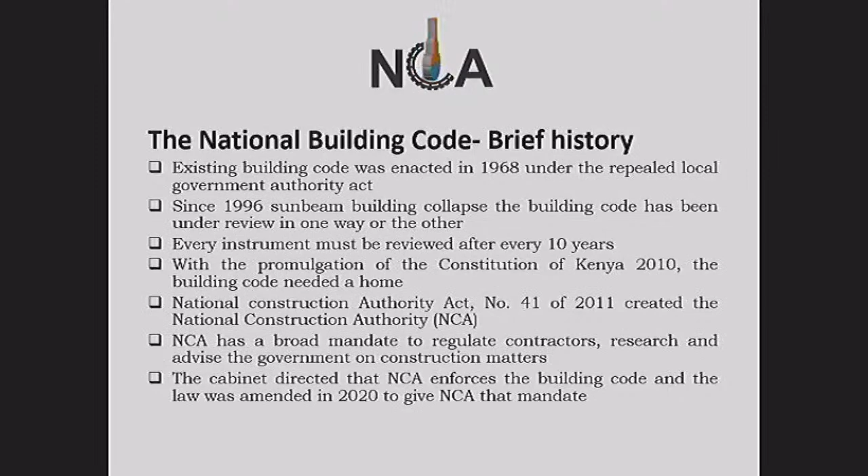I know the previous speaker introduced us to the history of the code, so I'll start on the actual code itself, very summarized. The beginning of the code looks at definitions, and we try to identify definitions that are not the same as in the English dictionary. For example, the term 'engineer' is defined as a person registered and licensed under the Engineers Act of 2011. Then, what does 'fire damper' mean, and is it different from a damper as you'd see it in the English dictionary?

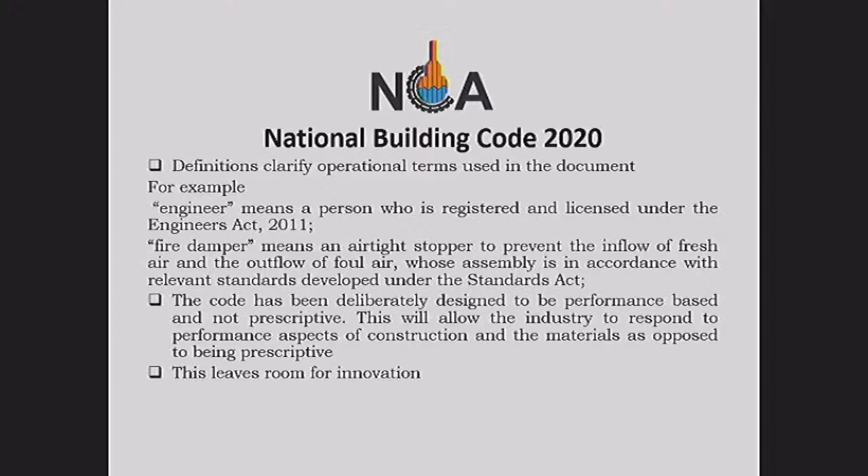The code has been designed to be performance-based, not prescriptive, which was very much the old code that told you what you have to use and do. So we are saying the industry, as you construct, can now respond to performance aspects of construction and materials, meaning you can use any material so long as it is performance-based and can meet the given safety standards. Obviously that leaves room for you to innovate. So the purpose of the code is to promote order and safety in construction works.

As contractors, you need to be safe in the space you're working in. We're also looking for the health and safety of persons in and about construction works - those living in the building, those constructing, and those outside the construction site. If I'm a passerby as you construct, my safety should also be ensured.

So the scope of the code is to cover design, construction, operation, maintenance, and demolition of buildings. We start from the beginning, and operation is very important because that's the longer life of the building. The maintenance aspect means we need to look after the building so it can serve its intended purpose. And at the end, when we demolish, how do we demolish a building safely?

Now these days, the code has an issue with the use of second-hand materials, but we are saying that is something that will change, because obviously we are all using second-hand materials. We should be allowed to do that for sustainability and to recycle materials. There will be standards for building materials, systems, and services - that is also in the code.

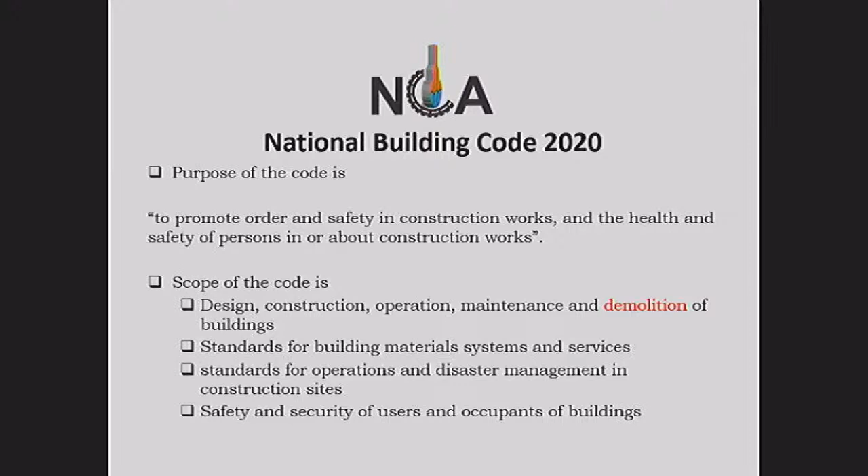Within the code there is also safety and security of users and occupants of the building, so that when we're in a building like this, we don't feel maybe we should not be here for much longer. With COVID, this becomes even more important - how are we constructing so that you are not just safe from the construction itself, but the air quality within the building is also assured, so that when I leave the Kenya School of Government, I'll feel I was in a building that is certified COVID safe.

So the code is an adaptive law, and it is adaptive because we are leaving it to the counties to use the code and adapt it to the needs of their community and the materials available within their particular areas.

It focuses on building control, and this is important because even as we talk to the planners, we are feeling planners look at development control as we look at the building itself. So there's no conflict - there's harmony with the Physical Land Use and Planning Act, which is a new act of 2019.

It also works in harmony with other laws, like the Standards Act - and very important, we have somebody from KEBS here you can talk to about standards. She says you decide which material you want to use and then bring it to KEBS for a standard. This code also appreciates other laws like the Kenya Roads Act, the Water Act, and the Public Health Act.

The Public Health Act is very important because if your building is unhealthy, what we call sometimes sick buildings, the Public Health Act inspectors can actually close it, and they can even ask you to demolish it. So it's important, even as you read this code, that you also read these other acts that we pointed out.

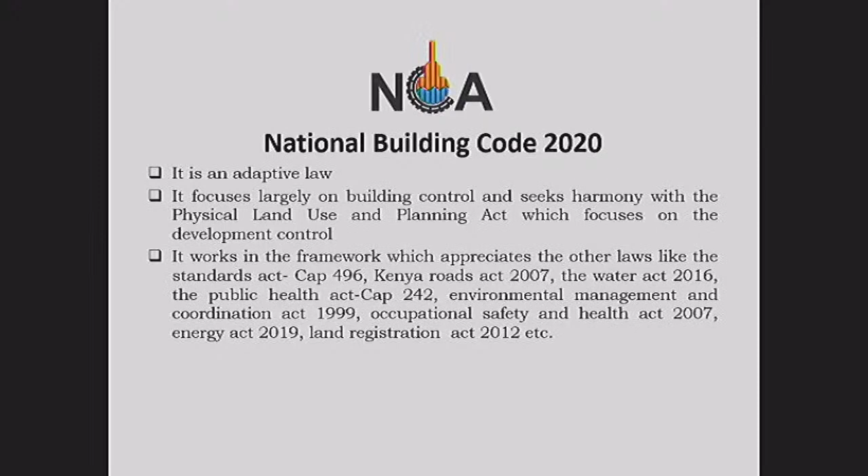Then the Environmental Management and Coordination Act, EMCA - whenever you're seeking approval for a building, you need to go to NEMA. Then we have the Occupational Safety and Health Act of 2007, the Energy Act as well, and the Land Acts, starting with the Land Registration Act, the Land Act, and the Land Control Act - all those land-related acts would also be of importance as we look at the code.

Part 2 looks at siting and space about buildings. Why do we look at siting and space about buildings? This is really to ensure health and safety of users - those inside the buildings, but also those outside the building. The code should obviously be compliant with planning requirements.

That's why even you contractors need to read these together with the Physical Land Use and Planning Act - issues of frontage, so that you do not obstruct the road outside, and issues of view: as you come out of a space, are you able to access the road outside without blocking traffic?

And then we have means of access, again, that is also important. And then the fact that a building shouldn't obstruct, endanger, or cause nuisance. Because you're not living in a vacuum, or building in a vacuum. So your building should not be a source of nuisance with neighboring spaces. And this is why NEMA then is important when they do their stakeholders, or they require you to also be part of agreeing whether a building should go on or not.

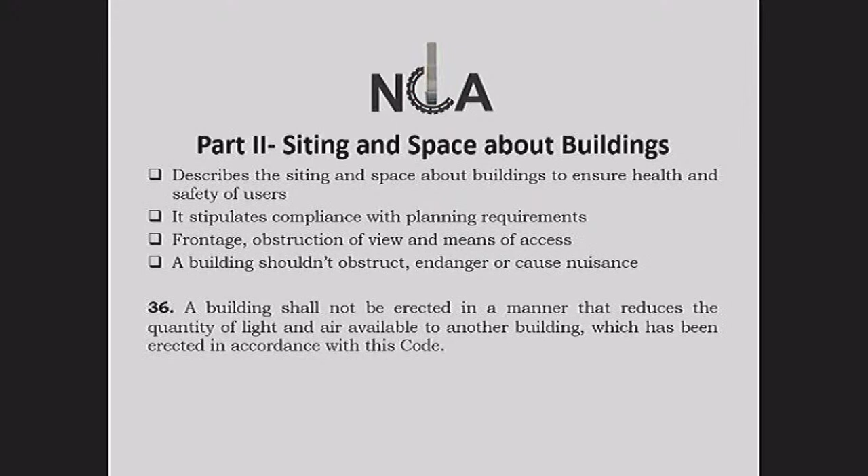Then a building should not, within this siting and space, be erected in a manner that reduces the quantity of air available to another building. And this is important even as we build buildings back to back, that you ensure you're not denying your neighbor air that flows freely into that building. You're not even blocking light for the other building as we also construct. Just be mindful. But now this will be under law, even as we talk about being mindful of our neighbors.

Part 3 looks at parking spaces. So it stipulates the requirements for parking and external circulation, so that when I come into a parking space, I'm able to have the standard parking space as required, but also able to circulate.

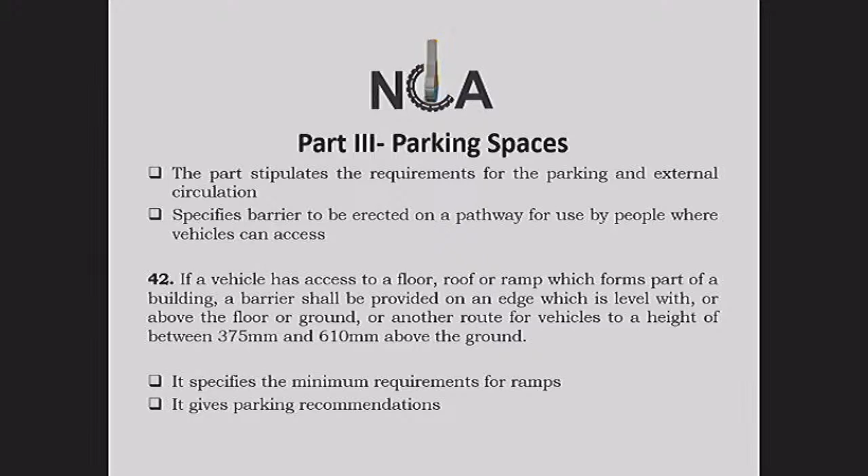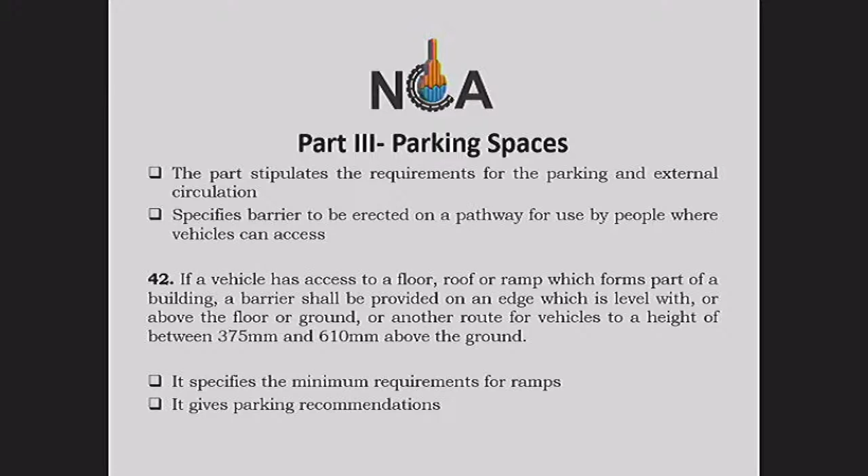Then it specifies also a barrier to be erected on a pathway for use by people where vehicles have access. So looking after not just the driver or the vehicle, but also that pedestrian in that particular area. Within parking spaces, if you have access to a floor, roof, or a ramp for vehicles, then it's also part of the building, and therefore the specifications are given in this building code. So it specifies the minimum requirements for ramps, and also gives parking recommendations, so that you don't have very tiny parking areas, so that when you open the door of your vehicle, it hits the next vehicle, hits a wall or a pillar.

Part 4 looks at site preparation, and this is really saying that before you erect your building, or alter, or scaffold, or even demolish a building, the owner of that building shall erect a fence. And I think a lot of people are doing that now. So erecting a fence, hoarding, or barricade, and this is to prevent the public from entering the plot. And very important, not just to prevent them, but also to protect them from activities at the plot.

And we've known accidents that happen outside of the plot, on the pavement or on the road, when a stone or materials fall from a building and have killed people. I was sharing yesterday, there was one student engineer who was killed by a stone that fell from a building. And I knew that student engineer, so it's very close to my heart, that aspect of safety.

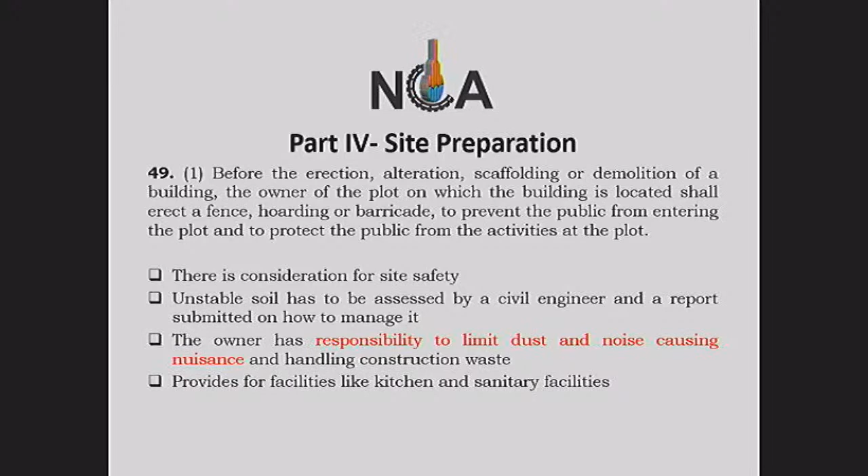So that consideration for site safety, unstable soil has to be assessed by the civil engineer, and a report is submitted, and I think you're already aware different soils need different considerations. The owner also has a responsibility to limit dust and noise, and also handle nuisance and any construction waste. Within the site, contractors are required to provide a kitchen facility and also sanitary facilities, even now. So we are saying the code now tells you, you don't have a choice, you have to do that.

Then part 5 is looking at building materials. And the building materials here, what we are saying, again, is performance-based, not prescriptive, but they must comply with the Standards Act Cap 496 of KEBS. And I think when you talk to our engineer on the standards, she'll tell you even the stabilized soil blocks have a standard, and the EPS panels also have a standard. So already the alternative building technologies are being given a standard by KEBS, and therefore we can use them now.

So considerations for circular economy are not locked out, as long as the material used in construction complies with the relevant standard. So we are saying any material, mud, stone, sticks, brick, roofing material that is grass, thatch, or makuti, all those materials can now be used. I think if you listen to the previous speaker, he said those are used in tourist hotels, but we have not used them. But now we can use them so long as they comply to the standards required by KEBS.

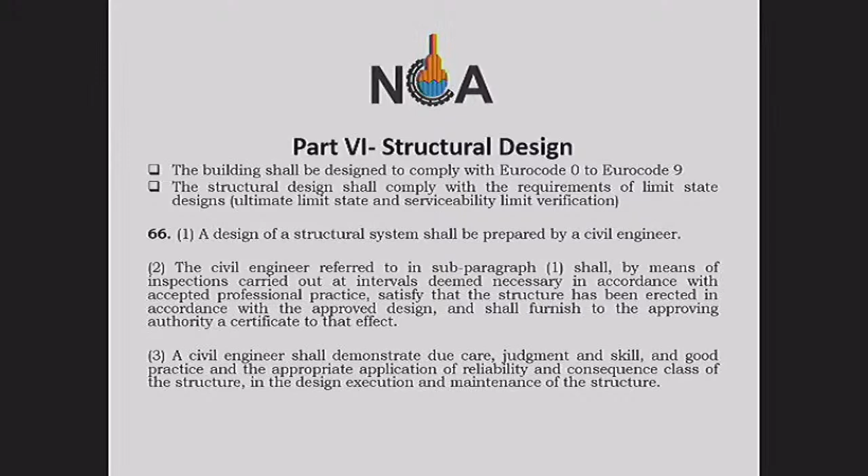Continuing on structural design, excavation that is more than 3 meters deep shall be designed by a civil engineer, and adequate supervision and quality control should be provided at all stages of design and construction of structural work. If you have a building with 4 stories in height and you're looking at a foundation, this should have a geotechnical investigation report as well.

What we are trying to do is make sure the buildings are safe. Initially a lot of collapses used to happen in Nairobi, but now you can see collapse of buildings happening in the counties as well.

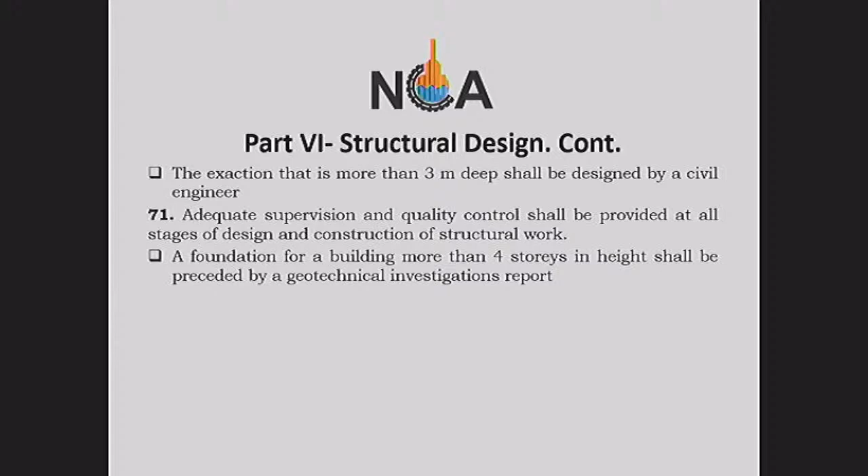Then in terms of space within buildings, this is part 7. We talk about the height of the space, giving a minimum in terms of ceiling height, and the minimum dimension of a landing, lobby, and passage. So really making sure there is enough space for people to move around the building.

If you have a swimming pool, you must ensure that there is a wall or fence so that a person cannot access that pool from the street. Any stranger coming into your space should not be able to access the swimming pool. I know one case in a school where somebody was able to access the swimming pool and was found in the morning. He couldn't swim and he was gone. So these are practical examples of why this should be here.

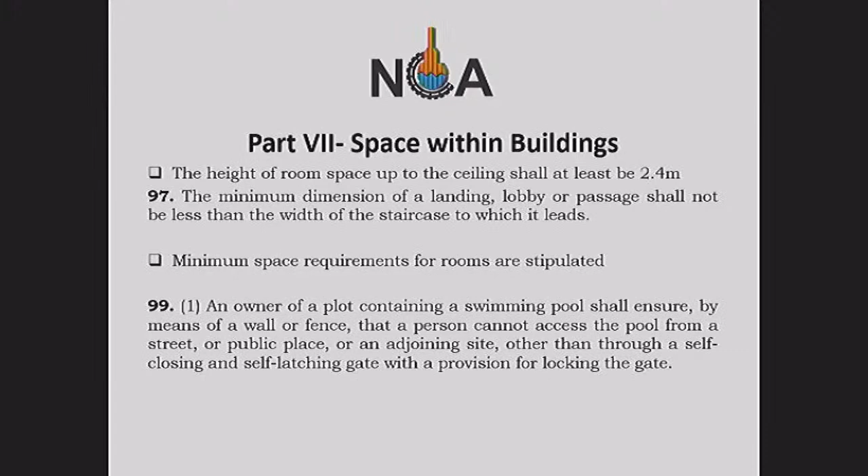So if you have a gate, it should have a self-closing and self-latching gate with a provision for locking. So we're not just talking about safety in swimming pools for children 12 and under, but also for grown-ups. Part 8 is looking at floors.

If you're looking at black cotton soil, how do we look at floors, because it affects floors? Black cotton soil ideally should be entirely or partially removed, or you have a suspended floor erected on the black cotton soil, because you know the qualities of black cotton soil. The requirements also for floors in relation to fire are also set out.

Floors should not be slippery, and we need to be very careful in the choice of flooring material, floor finish, especially ceramic tiles. In terms of floor finish, they should be approved by the architect and the civil engineer supervising that project. Again, the requirement to have professionals on site.

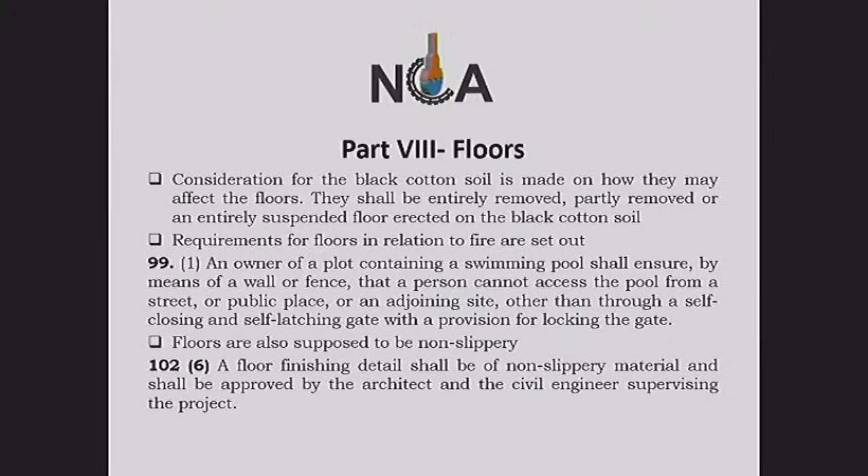Part 9 talks about walls: foundation walls, retaining walls, and load-bearing walls. Ideally, they should be safe. A lot of the time buildings will collapse because the walls were unstable, or the walls have collapsed and therefore the building falls.

Other than that, we must ensure that the wall is protected from the elements, especially rain. So contractor, you need to construct a wall that is resistant to penetration of water. And then the argument that hollow blocks cannot be used to construct a substructure foundation wall.

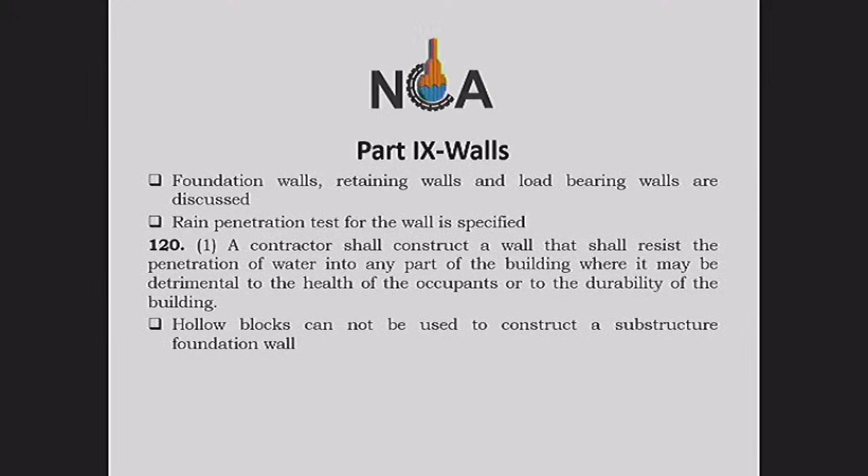Then I'll just finish on part 10 before the architect comes - the other one was part 9. Part 10 looks at lighting and ventilation, and this is important, especially with the need now for a healthy building.

Rooms should have means of lighting and ventilation which enable the room to be used without detriment to health and safety, or causing nuisance, for the purpose for which the room is designed.

We are really looking at reducing our energy bills, so sufficient natural lighting should be provided, and artificial lighting should be a supplement. It should not be the main source of your lighting, so we can reduce electricity bills for investment purposes for the landlord or investor, but also for our own health, because your eye is better trained for natural lighting as opposed to artificial lighting.

Natural ventilation is also recommended, and as much as possible, have the windows open as opposed to AC. All these energy efficiency and environmental design considerations are based on the Energy Act 2019.

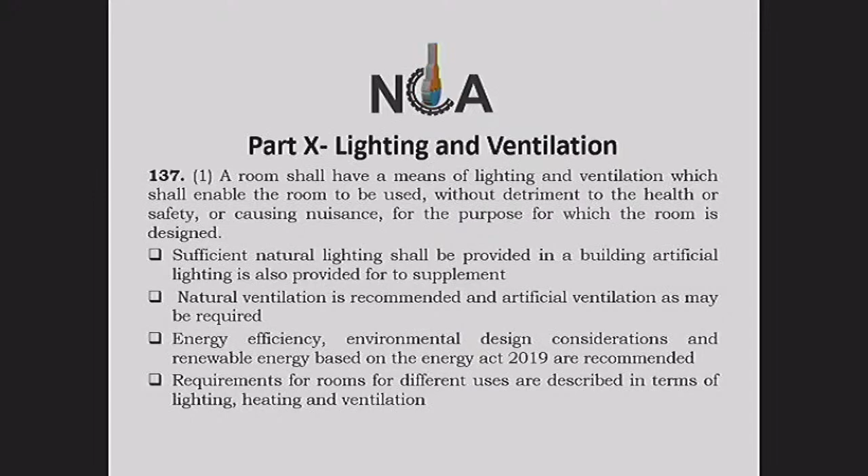Thank you, Dr. Catherine, for that elaborate presentation. I'll pick from where you stopped. Basically, the part that she was handling is on architectural issues, on materials and design.

I think for the sake of the camera, I'd like to keep my mask on. I adhere to COVID rules consistently. Let me remove it for the sake of the camera. Thank you.

That clause 190, the responsible architect or civil engineer shall receive from the specialist manufacturers a warranty that a full thermal movement safety check has been carried out related to unbroken areas of glazing. So it's like checking on the glazing that is being used by the designers, and the warranty from the manufacturers. It talks about specifications in terms of size, thermal check requirements, and the glazing thickness for curtain walling, which is also limited to a certain measurement, like 6 millimeters. Then we've got...

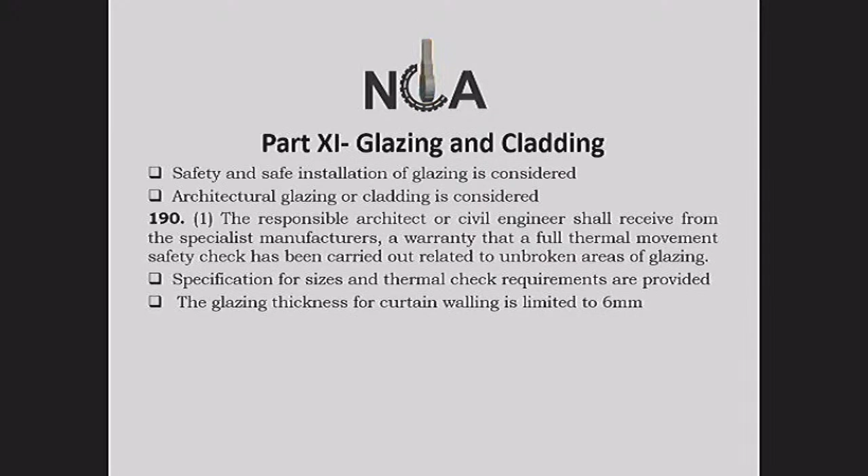Vertical circulation for buildings, where we have a part now discussing staircases, lifts, and escalators. There are several clauses on that. An example is clause 200, that talks about a building which exceeds 1 story in height shall have at least 1 staircase to access the upper floors. So in a building that exceeds more than 1 story, that is 6 meters or even less than 6 meters, because a story can be with a mezzanine, you shall design and have a staircase for use.

The same case happens to lifts. Lifts are limited to a certain number of floors, and a building shall have a means of escape in case of any emergency, as may be required by the intended use of the building.

We talk about safety, like this auditorium. I know there's one of the clauses that talks about auditoriums, in terms of signage, in terms of access, emergency accesses, this code seeks to enhance that. Special staircases, firefighting shall be considered, and a staircase shall always be safe, like having a handrail.

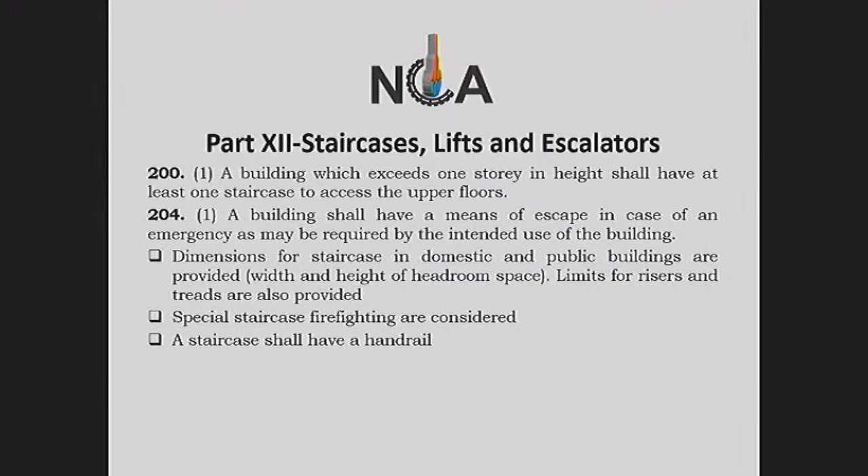Then we would have part 13, or part 12 continues discussing staircases, lifts, and escalators. We talk about considerations for escalators, and firefighting lifts are provided with their measurement and usage. Then there will be safety considerations and warning signs in regards to lift pits, such that, as one of the clauses says, the pit used for the lift shall not be used for anything else, and there shall be access to the machine room and plant rooms that shall be considered.

It talks about roofs in part 13, Roman numeral 13, some of it is written in Roman. It talks about roofs, and we talk about considerations for design of roofs. We talk about pitch roofs. We talk about flat roofs. We talk about waterproofing standards, which will also be provided there.

One of the clauses, like 251, where a nominally flat roof of boarded or concrete construction is used, it shall have an impervious surface and a fall not less than 1 in 50.

Currently, many of our clients, the consumers, the developers, have all of a sudden gotten an interest in flat roofs. When I was schooling back in the 90s, we were discouraging flat roofs, I don't know where, that's where architecture comes from. We were discouraging flat roofs in the tropics because of heavy rains. But all of a sudden there's an awakening, and people are finding flat roofs very good, and they are requesting for the sense of flat roofs. So when we do that, we will be considering waterproofing and the challenges that come with a flat roof.

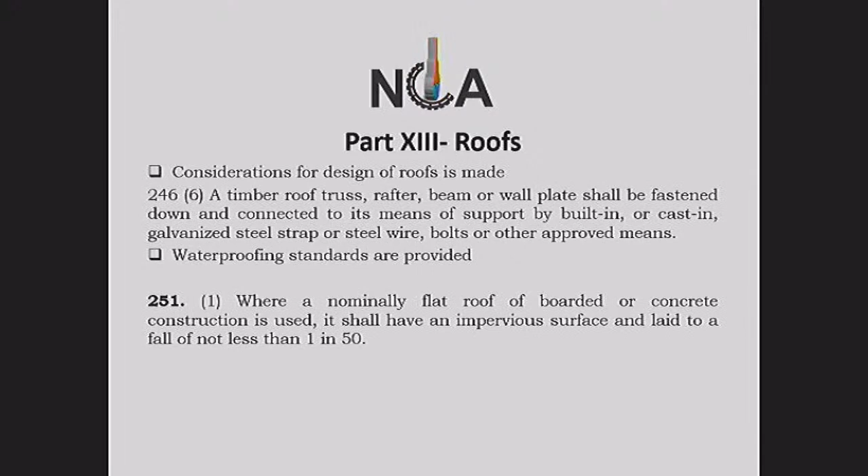Part 14 will talk about water services, drainage, waste disposal, and stormwater. Basically, this code is for use by designers, engineers, architects, contractors, and even the consumer, who are the stakeholders, the developers.

We talk about rain water harvesting, which is provided, as well as plumbing that separates grey water from black water. I was discussing that with Dr. Catherine in the morning, because of the effect of soakage for certain soils like black cotton soil, you realize this is not being adhered to. So it's not a prescriptive regulation, but more performance-based, where I have room to design for that particular site.

He'll talk about provisions of wash closets, and appurtenances are provided with reference to the correct standards. So when we talk about stormwater disposal and wastewater disposal, we give guidelines on how this is supposed to be done.

Clause 285 says the owner of a plot shall provide suitable means of control and disposal of stormwater which may run off from the construction works, not only for the developer, but also for the intended user or the person using that facility.

There are also guidelines on sewers, design of sewers, and appurtenances are provided. We try to simplify terms. When we were sitting down with our lawyers, they wanted some description of these terms, so that we do not use a term unfamiliar to people working in the built environment.

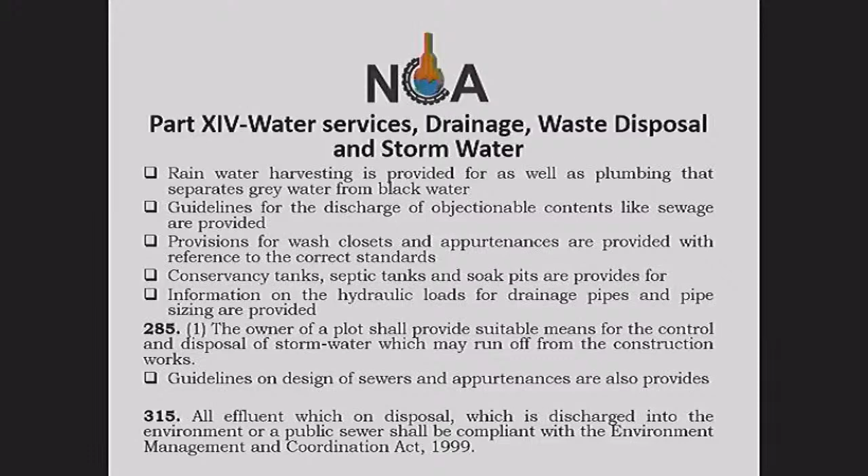There are electrical installations also discussed in the code, and standards for electrical installations are provided. After sitting with engineers in the committee, I've come to realize that engineers design with codes. That's why you'll find Euro codes, and ones that have been customized to become Kenya Bureau of Standards codes. That's what would actually be in this code to help us develop. I think there was also some interest with the World Bank.

They are very particular on which codes we are actually using. I believe for people who want to develop a building within our country and are not Kenyans, they would be more comfortable designing with codes that are internationally accepted, like the Euro codes.

It will talk about installation of protection against lightning. Lightning is provided, and a switch socket, an isolator, a consumer unit, distribution board, an electric bell, a television outlet or data outlet in a building shall be installed in accordance with KS ISO 21542, the standard on building construction, accessibility and usability of the built environment. So it keeps referring to codes so you can design within that.

In landscaping, I think this is an upcoming field where we are realizing we need a sustainable environment. In landscaping, an owner shall provide soft landscaping area at least 20% of the plot area, which shall have trees, vegetation, and permeable paving surfaces.

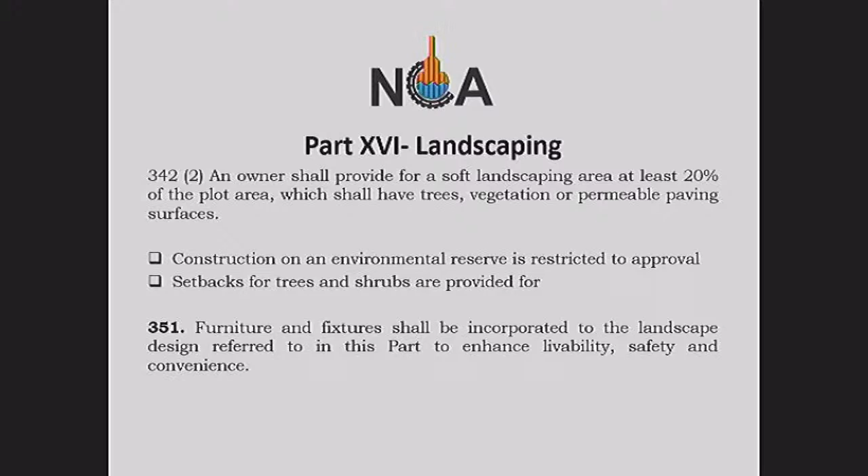Furniture and fixtures shall be incorporated into the landscape design referred to in this part to enhance livability, safety, and convenience. For me, the building code is about safety - safety in the construction industry, and safety for the user that we are designing and developing for.

There will be a part on inspection and maintenance of the built environment, and provision for inspection of a building after every 5 years is provided for. Several inspection types are anticipated: visual inspection, full structural and civil inspection, full building condition survey, full building services inspection, and specialized building investigations, like what Dr. Kathleen practices. They come in terms of these inspections, and that is provided for in the code.

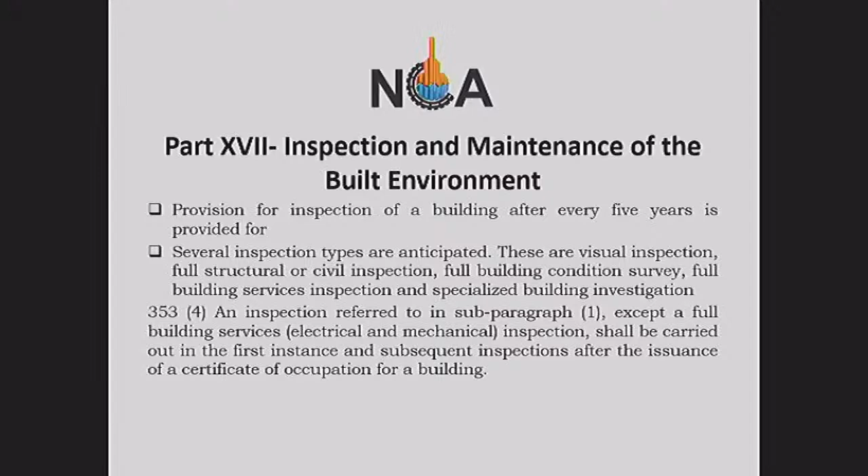Part 18 talks about non-waterborne waste disposal. Siting and construction of pit latrines is discussed in detail, and the practice manual for sewerage and sanitation services is referred to. Clause 360 talks about a latrine, saying a latrine and an ablution shall be provided as separate compartments.

Each compartment shall have minimum dimensions of 1350 millimeters by 750 millimeters, and as a combined compartment having a minimum area of 1.35 square meters. We are actually talking about minimum - we leave the designers to be able to design within those parameters.

Then part 19, we'll talk about refuse disposal. Nowadays in our community, especially in Nairobi and the surrounding areas which we call Nairobi bedroom, people have got an organized way of collecting garbage. In the code, every building shall have approved means of refuse storage and disposal within your compound. Details of storage chambers and containers are provided for, and provisions regarding chutes, hoppers, and incinerators are also provided for here.

Clause 369 states a service room containing an incinerator shall be separated from the remainder of a building by a fire separation that has a fire-resistant rating of at least 2 hours. The design, construction, installation, and alteration of each indoor incinerator shall be in accordance with the Environmental Management and Coordination Act 1999. This is how the building code interacts with other existing laws used within the building environment, because the code is not just operating on its own.

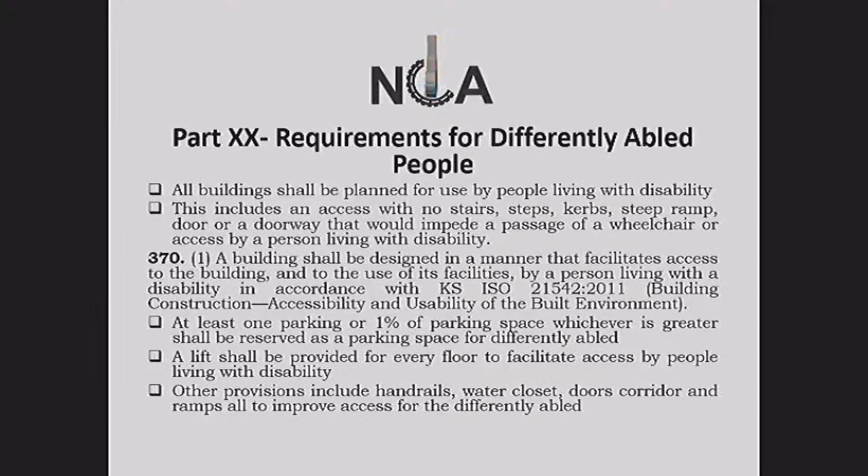Part 21 talks about fire safety and fire installations, and we actually have an expert on that. That's why we have Engineer George Karoki to assist us, and he'll tell you that every building shall be designed and constructed to ensure that in case of fire, safe evacuation is possible.

There is a limit to the spread of fire. The building remains stable, so as not to endanger other buildings. Like when he went to Dedan Kimathi University yesterday, the first thing he noticed was the signage. And when he got in here, the first thing he noticed was that the door is not opening to the outside. This door, I think, is the fire exit door.

I checked when I went up to the washroom to see whether you have a door at the back, because people should be able to evacuate an area like this one. The building code will now assist us in guiding how you can design a building to be used for safety and for safe evacuation during a fire.

A mechanical engineer shall design and certify the firefighting system, provide a firefighting lift, and also provide a staircase for firefighting, or the rescue staircase. Provisions are made for separating non-combustible walls as well as fire division walls. You talk about materials, and how they can resist fire in case of a fire outbreak.

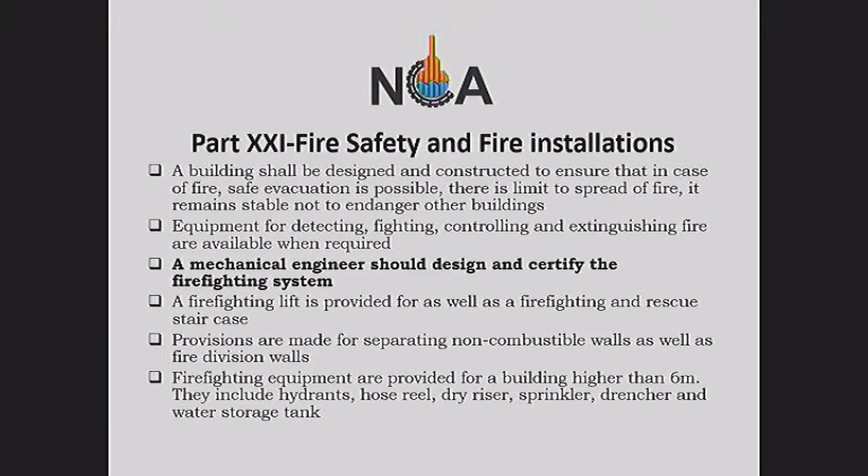Firefighting equipment are provided for a building higher than 6 meters. Such a building shall have firefighting equipment, whatever kind, including hydrants for provision within the compound. There will be a hose reel, the dry riser for such buildings, a fire sprinkler system for special spaces like basement parkings, a drencher system, and a water storage tank to provide water to fight fire in case of a fire outbreak.

As you can see, it's a whole big part, and there are still more clauses on fire safety and fire installation, like clause 460: a building shall not be erected on a plot unless the plot has access for purposes of firefighting and rescue from the building.

Even in slum areas, and I'm happy for what the World Bank has been doing with KISIP and other agencies trying to improve our informal settlements, we should be able to provide access for firefighters in such kind of areas.

A building shall have emergency evacuation coordination procedures posted along all floor exits, including in the form of diagrams displayed in a way easily understood by a person. I believe that could be missing here. We should have signage for firefighting showing the escape route, and how to behave in case there is a fire outbreak in the space you are in.

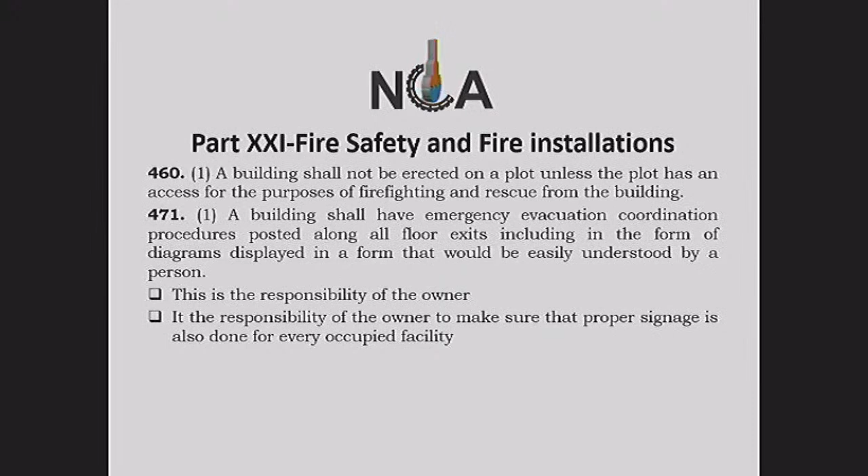Part 22 talks about demolition of buildings, and this is about safety. Clause 485 says all demolition works shall be carried out under the supervision of an experienced person for safety. Demolition shall be done by people who understand the structure being demolished, under the immediate supervision of a qualified engineer or architect. Somebody yesterday mentioned that we do not just demolish a building because it's illegal.

There are some buildings that could be demolished to give way for bigger development. When that demolition is happening, an engineer, architect, or somebody knowledgeable about demolitions has to be engaged so we can have a safe environment when demolishing, and also be able to salvage some of those materials. It reminds me of what happened in Nairobi with the railway scrap, which was being demolished.

Being part of the ministry that was charged to demolish it, I got to overhear that they were trying to salvage the materials that were there. So we need professionals involved in demolition of such buildings, probably even to ensure continuity and sustainability.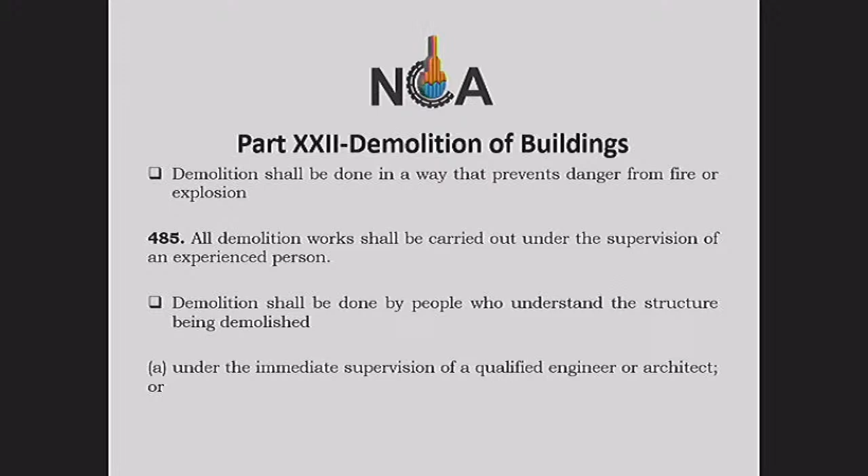Part 23 talks about disaster risk management. A person undertaking a design, planning, preparation, or construction phase in the use or demolition of a project shall take account of general principles of disaster prevention in the performance of those duties during all stages of the project.

This is to ensure that persons involved in construction coordinate well for the safety and health of everyone involved. The owner has a duty to the designer or contractor to provide all pre-construction information. Designs done or modified outside Kenya shall have to comply with this code. Provisions for health and safety during construction, records of health and safety, safe place of work, site good order and security are provided for.

Part 23 continues with disaster risk management, talking about scaffolding and working platforms and how people involved in those areas, like demolition, should behave so they can actually be safe.

Just like what our Daktari talked about, this lady died at the University of Nairobi. I was passing along Stanley Hotel, and there were renovation works going on there. As I was practically there, a stone fell all the way from one of the floors and landed on somebody's head on the street, and the person passed on.

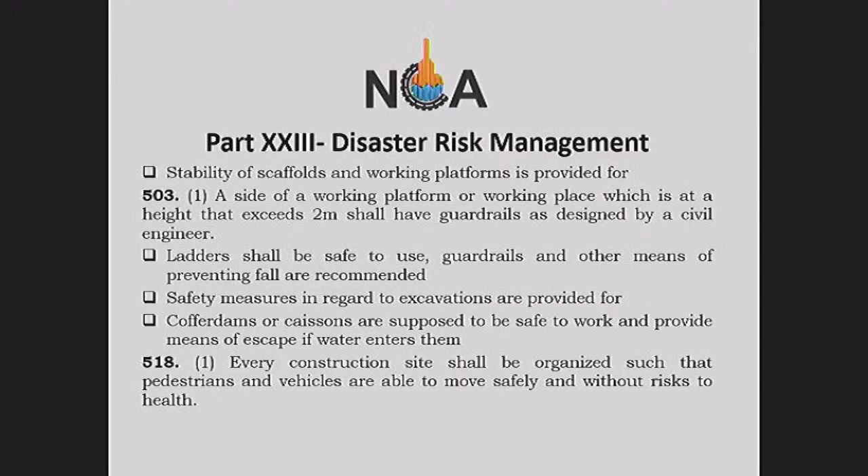Safety measures in regard to excavations are also provided for. That's the issue of ensuring that those deep excavations are well protected so we can walk around and be safe. That is part of part 23, which continues on disaster management.

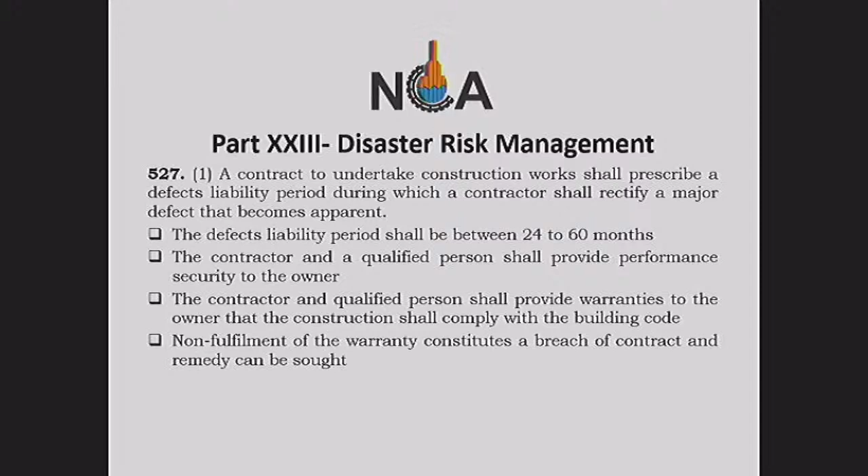I believe you have read the code. This presentation is about certain clauses in the building code. It talks about access roads in part 24, access roads, cul-de-sacs, and other private roads. The width of a road or street shall be guided by the street design manual for urban areas in Kenya. The code works together with other existing laws, and for urban designers, the manual used for street design is cited here.

A private street or cul-de-sac shall have a footpath at least 2 meters wide. Before this exercise, someone mentioned the area where they live, because when walking, probably there's nowhere to walk as a pedestrian. Even those of us who drive become pedestrians at some point, and it's very unsafe without that.

There should always be a footpath alongside a street, whether a cul-de-sac, a private street, or the normal access roads we use. The width of an access road shall be at least 6 meters, and the footpath thereon shall be at least 2 meters wide, because roads will go beyond 6 meters.

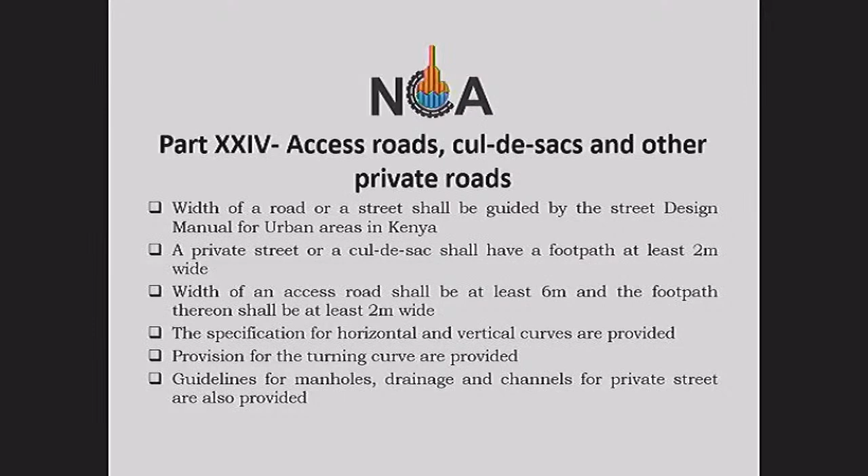The specifications for horizontal and vertical curves are provided, as well as provisions for turning curves, for bicycles, bikes, cars, lorries, and buses. This is so you can get guidance from a design manual, especially for us architects, who use those design manuals for such professions.

Then that's it for all the parts. That was part 26 -- actually, there are 24 parts, and then attached there are schedules.

The schedules are tables, useful for design, covering occupancy classification and structural Euro codes. Most of these things were in the old code of 1968, and as you go through it, we have not thrown them aside.

Probably you have changed the units -- some were in imperial units, and we are converting them to SI units used nowadays, but basically retaining them so they can be a guide whether you are a contractor, a developer, or a designer. You can cross-check.

Now, if an architect has given me a passage or corridor of probably 800 millimeters, is it adequate? You can check and probably be able to correct your designer.

There are several things in the structural Euro code schedules, with tables on general classification, bearing capacities, details on walls, air exchange rate per hour, green building index, sanitary features, and sanitation solutions like MBR, MBBR, and SBR. As you leave, ask yourself what MBR, MBBR, and SBR mean.

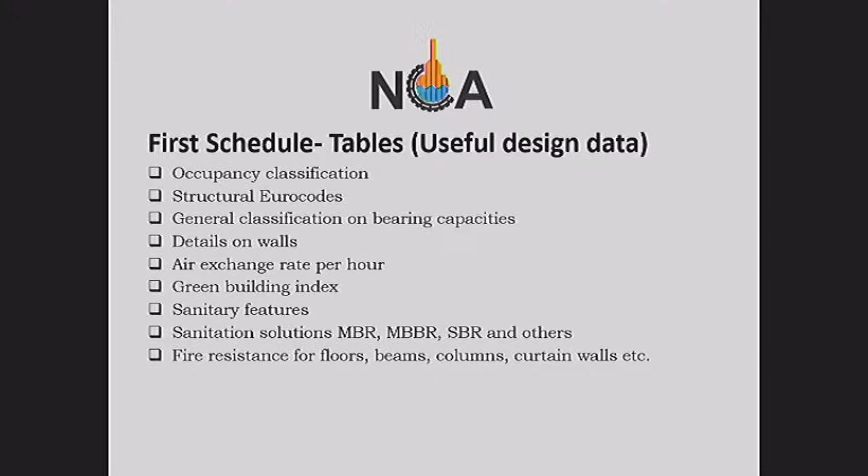There is a second schedule which is illustrative, with figures and dimensions like garage dimensions, minimum dimensions for garages, turning circles for vehicles, measurement of floor area or floor plan area, minimum floor height, glass thickness and dimension limits, and lift well enclosure and dimension.

Sometimes even for designers, those things are things I'm not acquainted with, so I can go to the building code and check. We had agreed with Dr. Kariuki that, just like yesterday, she would come and give us the way forward. Thank you. Thank you very much.